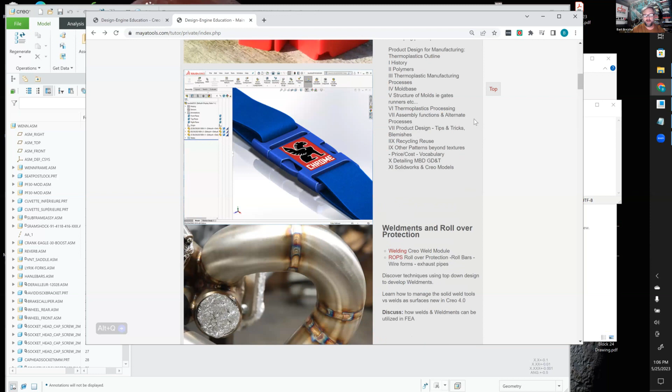So I'm going to scroll down, and I'm getting past the SolidWorks material. I find it funny that...

When I'm teaching a class to a bunch of SolidWorks people, or vice versa, SolidWorks to a bunch of Creo people, sometimes they don't know who I am. I've been using SolidWorks since 1997. I've got a lot of experience in SolidWorks. I think it's come a long way in the last 10 years, so I'm excited about it, but it's not Creo, and people just complain about stuff they don't understand. I just tell people, quit being emotional — let me just show you how this tool works.

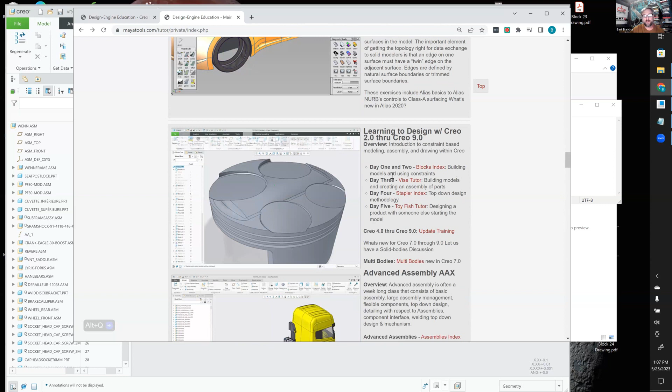So I'm scrolling down here to the Creo training. This big piston here is where Creo starts. This is our one week Learn to Design course. People with 5 years on Creo should take that course, and you definitely won't get bored.

People with a significant amount of SolidWorks or NX experience should take this course as well. I'm scrolling down through the top-down design program. I know a number of you on Zoom have had classes at Design Engine before, probably less than 10%.

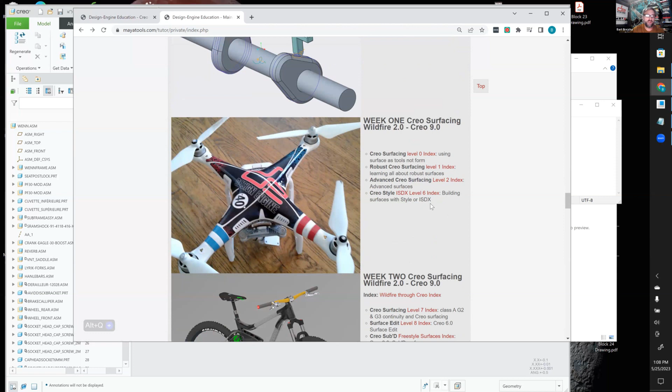Here's our surfacing week 1. Each one of these links is a 2-day class, so there's four 2-day classes crammed into a 5-day week 1. Week 2 starts with advanced surfacing. My definition of advanced surfacing is very different than what PTC might call advanced surfacing, by the way. And Class A surfacing, I'm coming down here to the REX and the import data doctor.

So this is leading me into my talk today. I put together a series of 2-day classes that make up what we call the reverse engineering week. Reverse engineering means many different things to many different people. If you're talking to a double E, they're thinking reverse engineering as in how a motherboard works, or maybe reverse engineering software.

We look at a competitor product and think about how it might work with CFD or structural integrity. So what often happens is the manager says, go out and get a scan of that thing, and as a good young engineer would, you just do exactly what they're told. What we need to learn how to do is ask narrowing questions without sounding argumentative, because it's easy to sound argumentative.

Well, why do you want the scan? Well, I don't know, just do it. What I'm trying to get at is, if we do this scan on this manifold and you want to do a CFD on it, and the manifold was designed in 1950, you want a baseline so we can change the design slightly, run a new CFD, iteratively, right? So the manager often gets frustrated when they get a scan and they can't change it at all.

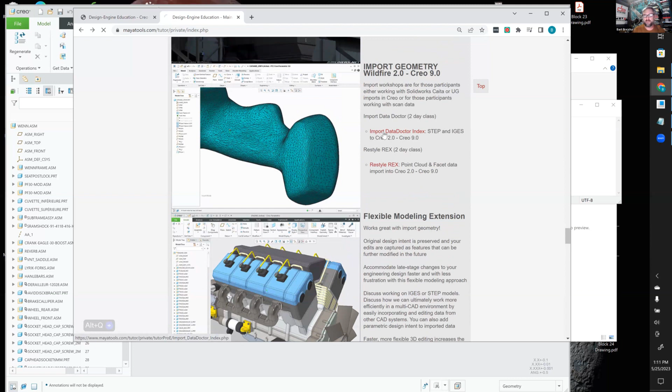All right, so I'm just going to quit rambling and jump into the data doctor exercises, and I'm just going to scroll down to show you. I've got a bunch of little exercises to do. I think it's important to start from the beginning.

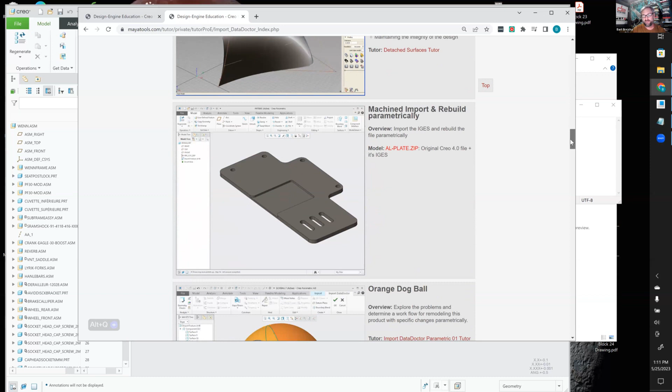If you were to give me a 2-day class, you're by far the expert at managing imports. But what we do inside that import is convert everything to be parametric. Now, I remember it was a Michigan Creo user conference that I was at...

There were two gentlemen, I overheard them talking, like, everybody knows you can't make dumb STEP data parametric. Let's go see what this idiot's got to say. And I was standing right there, you know. Well, I teach that class. I can make anything parametric. It's a workflow. Maybe that's a talk I did at the Badgerland user conference probably 15 years ago. But it's really simple, everything's a workflow, right?

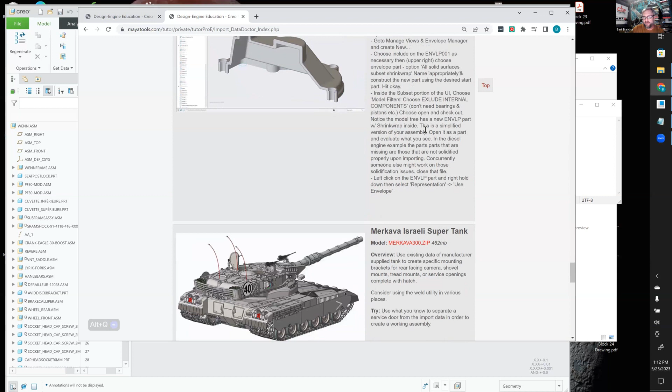So I'm just kind of scrolling through this thing. There's a bunch of assemblies to play with. Here's some imports that didn't come in, so we got to rebuild it so we can make the solidification occurrence happen, and maybe it's not shelled out. So here's a Merkava tank, pretty cool stuff. I've got a whole bunch of exercises to play with.

This is a sheet metal part, and it's very difficult for me to choose which one to do. So Deb had mentioned, hey, there's a couple people inquiring about nuts and bolts, so I was just going to kind of start with a few things and play around.

So this bicycle, we've machined it and we're racing it this year. This is a SRAM sponsored race team racing in Denver. Look, it's got a high pivot. So the design director of SRAM sent me a bunch of files that they had, and they delete stuff off the import so that we can't go and reverse engineer it.

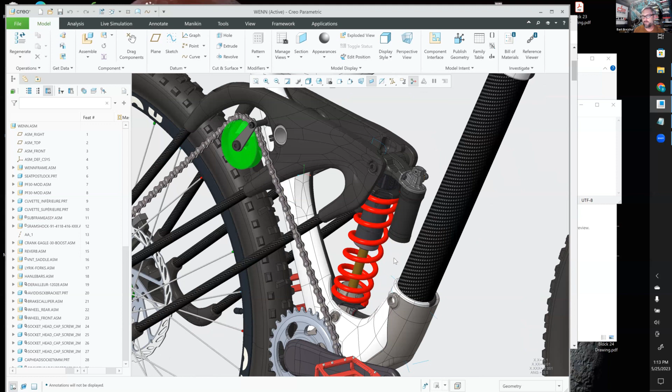So it was a couple years ago when I was designing these parts. I probably spent 20 hours just solidifying all the geometry. The front forks had holes all through it so that someone couldn't build a solid geometry and machine them. I fixed everything as an exercise. It's an extremely valuable skill set to have.

Taking something that shouldn't be 3D printed, or machined, and setting it up so you can machine it, right? You give me the model, I'll make it on my CNC machine.

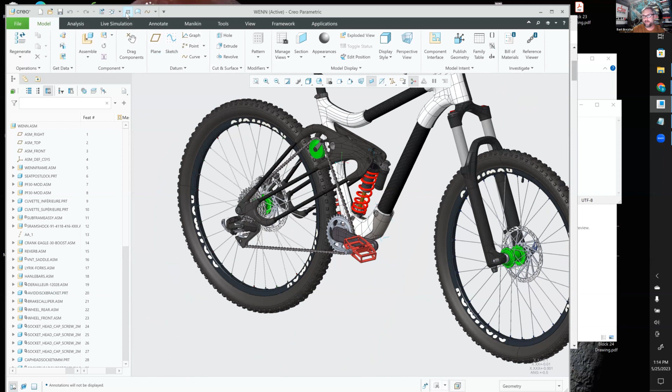So all the components that SRAM gives us, including the chain, is exported out of Creo and ultimately created as a step file.

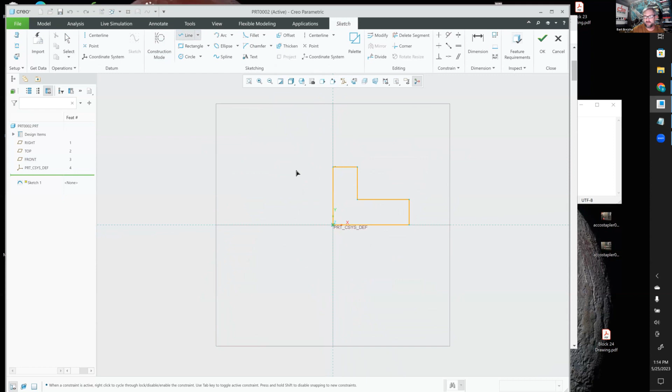So what I'm going to do is the very first exercise of our surfacing class. This is a really good introduction to what surfaces and imports are. I'm modeling just a simple little L bracket, I don't care about how it's dimensioned. I'm just going to extrude it, hit the middle button, and export this as an IGES file. IGES is just quite a bit older than a step file.

And then I'm going to bring it in incorrectly. Some of you, I recognize your names, you've had a class with me recently. And the joke is, if you wanted to complain about Bart's class, you'd say the instructor showed us how to do it wrong. Well, that's exactly why I show you how to do it wrong, so you don't do it wrong at work.

But if we try it a few times, we get pretty good at it. So I'm going to say IGES file. I'm in my Creo 9 import folder. I go file open, file open, I'm going to open the IGES file.

So this is one of the things I've been pushing PTC to do for a number of years, I'm going to say 20 years. You see this button? It says use templates. You can set this as a config setting, but nobody does, and I can tell you it wastes probably 4,500 hours a year with most organizations, including the US Army. If they just made this default, it would be so much cooler. I'm going to leave it off and do it wrong on purpose.

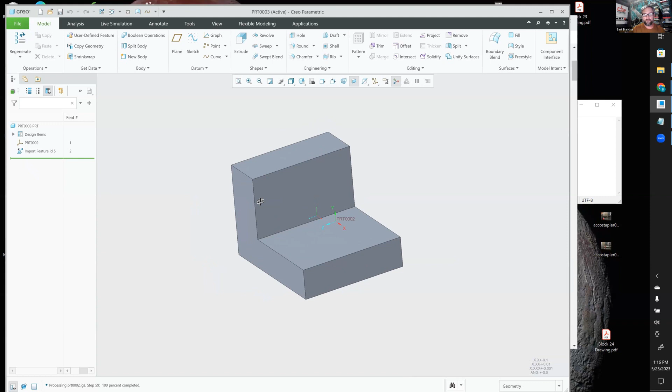Where's my datum planes in my model tree? Every single model I get from India and China comes back like this. Well, what I do is I write a script on 500 parts that I've got to make drawings out of. Our team's doing work for toy companies around the world.

Then you build the three datum planes, resume them, then you've got to rename all three. I want my script to do all that for me. It works about 80% of the time. And then you've got to add all the parameters from Windchill.

So if you're ever involved in hiring an outside company and the outside company doesn't ask you for your start part, that's a big red flag, pick a different consulting group. So that's not how I want to roll.

So I'm going to go file open, go for my import, and pick use templates. Now it's grabbing my start part. Look, datum planes, I've got all my named views. So I start out this talk on this point because it angers me how many hours we waste fixing stuff that would have been very simple if people would have just had a class.

All right, so I'm going to edit definition on this import. Hey, it came in solid. I don't need to edit definition on it, because maybe I'm Kenworth Trucks and I buy a lot of parts off of McMaster and assemble that after sourcing it on my tractor trailer.

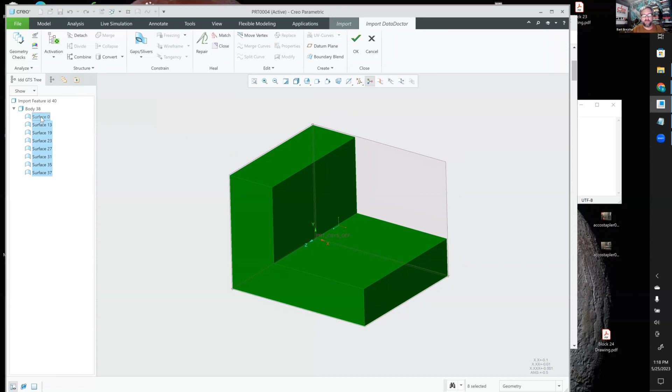I don't know, but what I've got are a bunch of surfaces that I can shift-select and delete if you wanted to. I'm going to hit Control Z because I have no intention of deleting them. So you can pick them on the face and get rid of them. Okay, I'm going to close out of here now, import data doctor, and I'm going to open up that block that I just had a moment ago.

I don't remember what I called it. And I've got a bunch of stuff in memory, so I have to remodel that square.

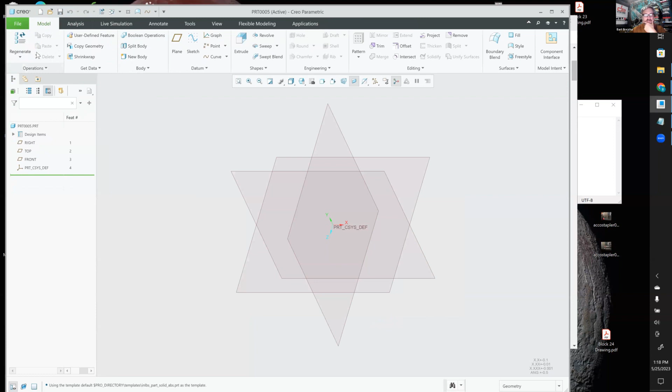I'm going to re-export it with another little setting. As we learn, surfaces are really nothing more than an interesting hammer to use for an engineer. It's a tool that can be utilized to make you more effective.

Okay, so now I'm going to file save as copy, and I'm going to save out as an IGES file again. Why? Because IGES files tend to be a little old. I'll just overwrite that one and call it 3.

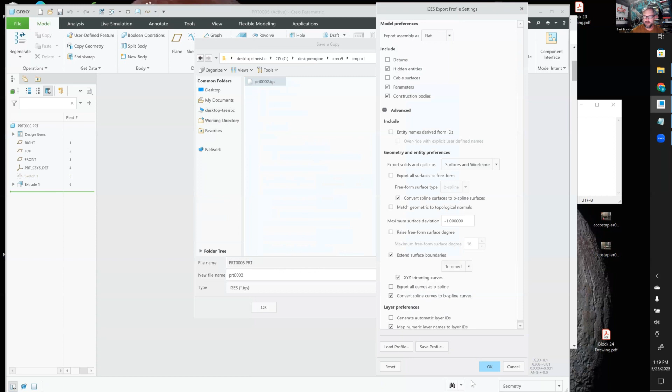This time I'm going to go into my options and change a few things. Instead of exporting it as surfaces, I'm going to take this bottom option. Oops, I meant to hit OK, but my Zoom interface is in the way. There we go. Now I'll just leave that open, and I'm going to go File, Open, and I'm going to grab that IGES file again.

Okay, this time it picks use templates. By the way, there's a config setting to set that. Now I've got my default datum planes, and look, I've got these extra curves on here. So let's go and edit definition and investigate what we get here.

I'm going to click on my import data doctor. Hey, look, in my model tree, I have a couple extra things to kind of mess around with. I'm deleting some of these surfaces here.

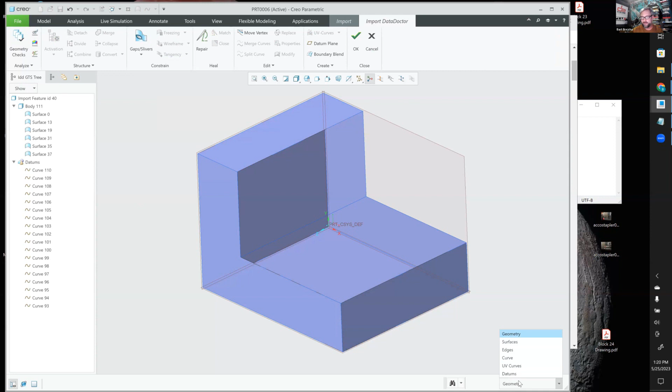You could window the surfaces too. You got to come down in here and segregate down to surfaces. If you left click here, anything you circumnavigate gets picked, top left, bottom right.

This is Microsoft industry standard for 25 years. Bottom left, top right, anything you cross gets added to the selection set. So I'm just deleting all the surfaces, and look, I'm left with the wireframe outer geometry curves.

How is this relevant? Well, if I have to go back and rebuild this stuff, I have things I can go back to rebuild with. This is kind of going down the road of how I make it parametric.

So look, now I can go in here and I'm segregated to surfaces. I'll go back to all the geometry, and I'm just going to pick all the vertical lines out here. Is anybody trying this as I go?

I saw Matt join. He used to teach this class a while back, Matt Holter. I'm just kind of removing some of the vertical geometries here.

And now this is where in the surfacing class, it can get a little bit confusing if you're not paying absolute attention. Usually in the surfacing class, this is a road less traveled, building it all inside of the Data Doctor tool. Look, I've got everything I need to rebuild this geometry.

Now it's a class. I deleted stuff. It was kind of perfect before I deleted it, but you get it.

I'm going to check out of it and get back into Creo now. I'm no longer in the Data Doctor. And I'm going to build my curve tool to reconstruct this stuff.

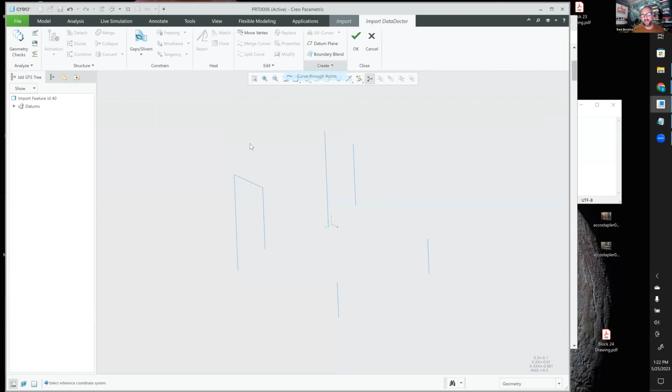I don't work at PTC, but I imagine their India partner built this tool. Who knows? But it works quite a bit like the style tool. In this case, I have to hold the control key down to pick the other side.

And how do you know? Well, if you don't hold the control key down, it becomes clear that you need to hold the control key down. So I'm using my Creo intuition, if you will.

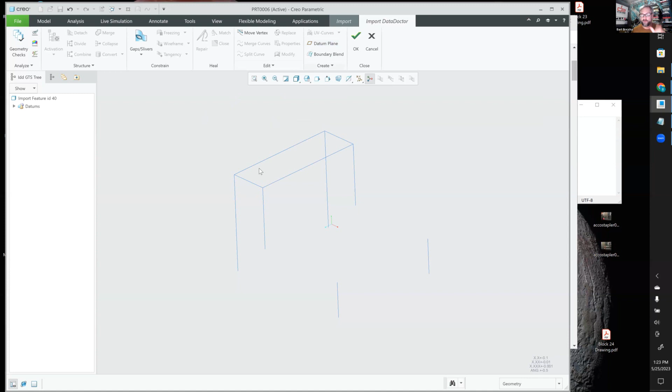So here I can go back and reconstruct this whole thing real quickly inside of the tool, and I can do it outside of the tool. Kind of whichever you care about.

Now, the typical BSME is going to think, hey, it's got to be better outside of the tool because I maintain some parametric ability. But you're tying it to something that we call dumb data. It's not modifiable, right?

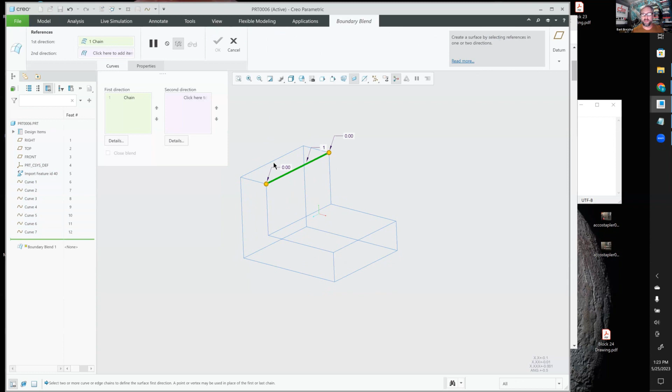I can modify it. It's quite modifiable, but most people think of it as non-modifiable data. And now I can build up surfaces outside of style, or I can build surfaces inside of import Data Doctor.

So the difference is the surfaces built up inside of Data Doctor don't maintain any parent-child constraints, much like Rhino. I don't know if anybody messes around with Rhino, kind of a toy. We teach Rhino, we're actually teaching a grasshopper class this week. I should be down there taking the class.

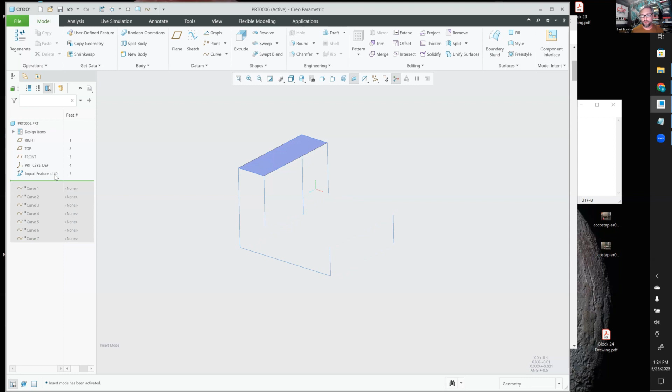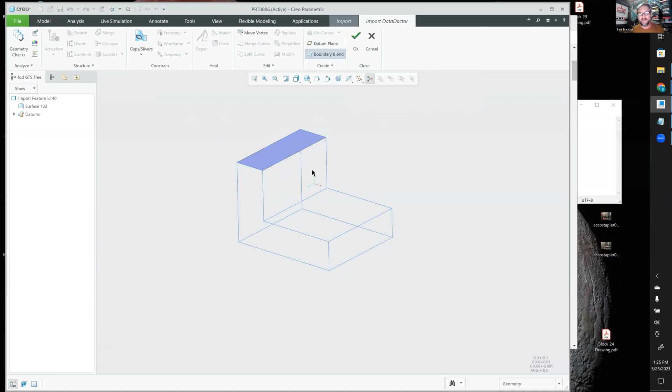Now I've kind of mixed and matched. I got a couple curves built inside of style and a couple outside of style. So I'm going to shift select the entire model tree and come over here to editing and collapse everything inside of the tool. There's some really interesting workflow ideas for managing modifications to a model, maybe I can get to that before the end. But look, I collapsed everything back in there. That seems like not a big deal, but it's pretty impressive to be able to do that, and there's a whole slew of workflow we can think about.

Now what I'm getting to here is that we can rebuild problematic geometry if necessary.

Hi Rowan, how you doing? You want to say hello to my friends? Say hello. Hello. Daddy, are we going to the pool? We're going to go to the pool later.

Yes, with class. Right, so I'm building all this stuff up inside of the Data Doctor. You know, you have a choice, I think that's pretty cool. That's the best part about being American, you got a bunch of choices, right? Now how do you merge all that together? Well, let's check out of it and see if it auto merges. Hey, it's not solidified, see?

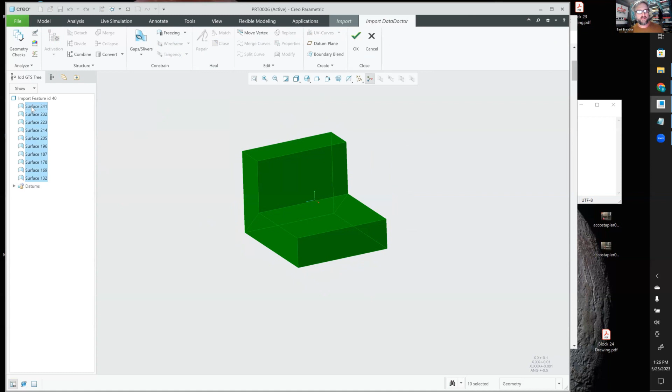So merge, if you know surfacing, is a technique that here we call combine. Okay, so now I've combined everything. Let's right click on it and see if it'll let me solidify it. Yep. Let's delete the solidify, redefine the import, and see if we can add bodies to the mix. Okay, for some reason it didn't work, but that's okay, we can just solidify the whole thing. Now I'm back to what I had originally. I can shift select both of those and collapse that, and now I'm back to what I started with.

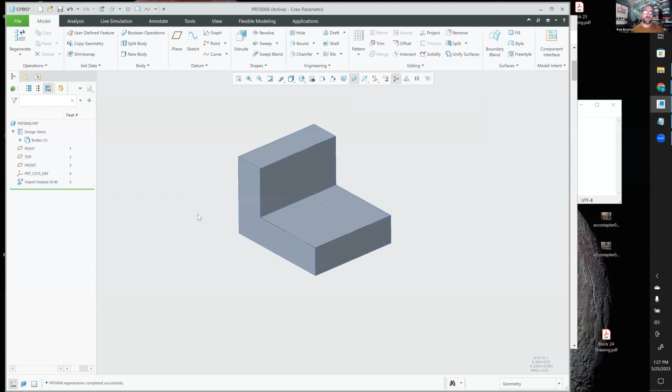So any questions? That's my first little example. I was just going to go down to the second example and play around with this pan head screw, if you guys are good with that.

All right, I've already exported this button screw, whatever we're calling it.

Okay, and I think somebody mentioned, how do I delete the threads off of something? Well, there's a bunch of ways to do it. The simple, easy way is just to create like a big old extrude. Some of our managers get kind of emotional about having too much extra geometry in the model, because it can slow down the spin and shading of the model. Look, now there's less surfaces in the model. That's the quick and dirty.

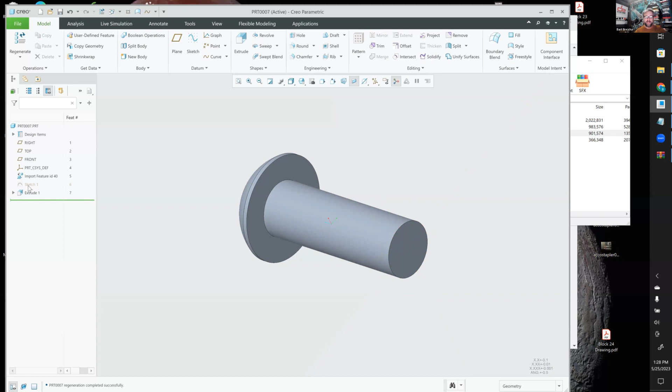The part that blows me away is what PTC has done to flexible modeling. Now I'm involved in a lot of the development of how Creo gets built and stuff. I encourage you to be on the technical committee.

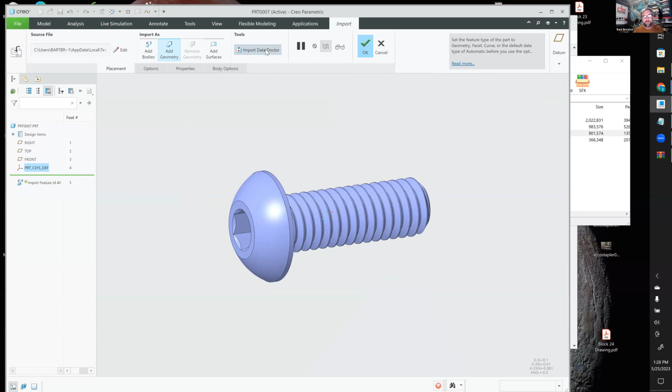I'm going to click on the import data doctor, and what I'm going to do is delete the Allen head hole here. If you're good at building selection sets, you're probably an expert at Creo. I'm just going to click on anything here and use the shift key. Look how it automatically collected all that, dude, I wish SolidWorks did stuff like that. Kills me, you got to pick every single surface. I don't know how they get away with it. It's like SolidWorks people just like clicking on things, I guess.

So let's hit close here. So what I did is I just deleted a hole. That absolutely blows my mind. I'm going to undo it and do it again.

This is how oftentimes early adopters like me will get in here and just play with every tool inside the import data doctor and learn things I didn't know you could do. This is how PTC would roll out. I don't work at PTC, so I should be careful about what I don't know, right? But this flexible modeling extension is where they exposed all those tools to let dorks like us play with it. Flexible modeling is wicked, so I'll do it again.

I'm going to click anywhere inside. I'm going to hold my shift key outside and shift select everything in between.

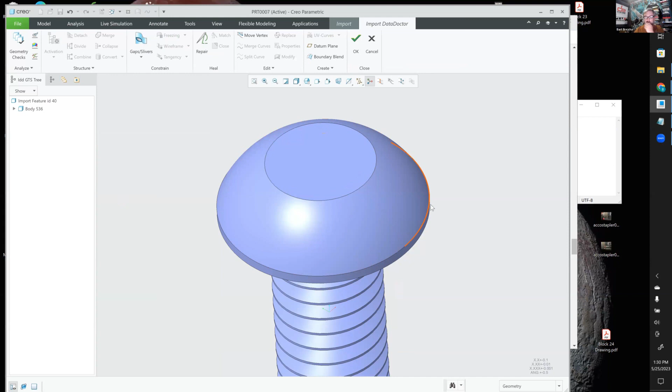Close. All right. For the flexible modeling, they use a different term, remove. Let's see if we can remove the ribs, the threads.

So here I got to hit control. I'm looking here, let's remove the chamfer as well. All right, it looks like I got the thread selected, both, I'm holding the control key now. I got the left and the right side of the thread. What do you figure is going to happen when I hit close? Look, I left something off here, right? I got everything. Let's hit close.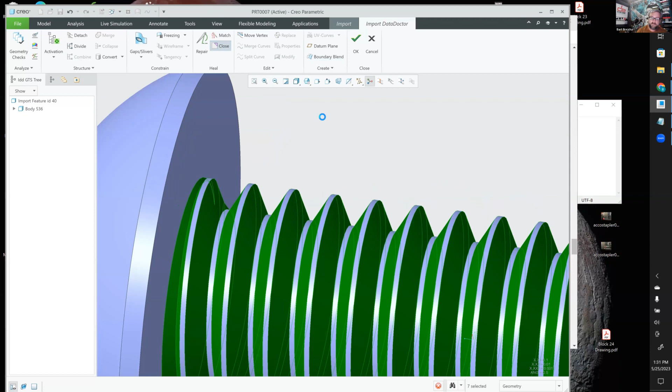Hit the middle button. The spinning ball of death for a second. I would expect it to have been done by now.

Okay, maybe I had too much selected, right? So we'll try it again. Pick the inside, pick the outside. This time, I'll just grab the chamfer as well. Hit close.

Next time I'll try and I won't grab the chamfer, or maybe I'll just grab the chamfer. While it's thinking, I'll look at the chat window. Some people making jokes on here.

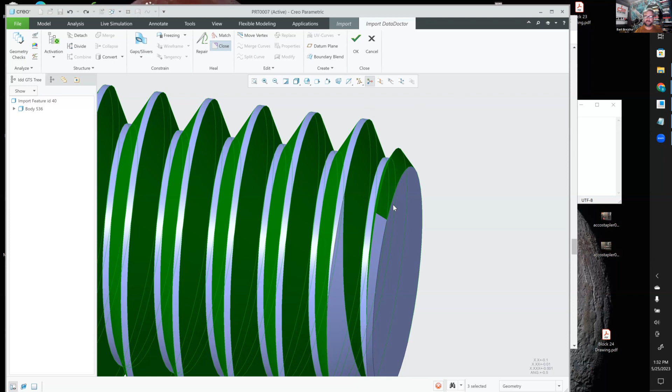Maybe I should have grabbed the inside wall as well, right? So you can hit this little stop sign down here if you want to stop it and try something new.

I noticed on a wish list, somebody said they wanted a stop sign. I was like, well, I thought they already had one.

So this time I'm going to build my selection set a little differently. This is all about how you learn, right? You got to figure out how you're going to build stuff. I still got my spinning ball of death. Okay, got back out of that. Let's try it again. This time I'm going to grab the inside wall and the ribs and the chamfer. Let's see what we get that time.

You know, and if you really want, you could just delete it or just create a solid over it like we did initially.

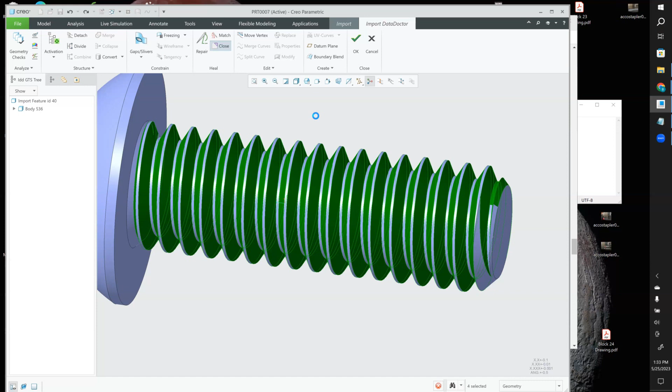Bart, this is Deb, my employer, so I don't know if you were in early, does not want these threads, and you've got a 100,000 plus component assembly. They also do not want us to just extrude over them with a surface or solid extrusion, because they said that, okay, it's still in there, maybe visually, but it's still in there, still complicates the model.

So anyways, I disagree, but there's two types. I don't mean to be argumentative, right? Because anytime you disagree, it just sounds argumentative, right?

And when you opened it, it had to regenerate the part. One was very tiny and one was very big. So we don't do that anymore. I think around version 9 they quit that, maybe version 10.

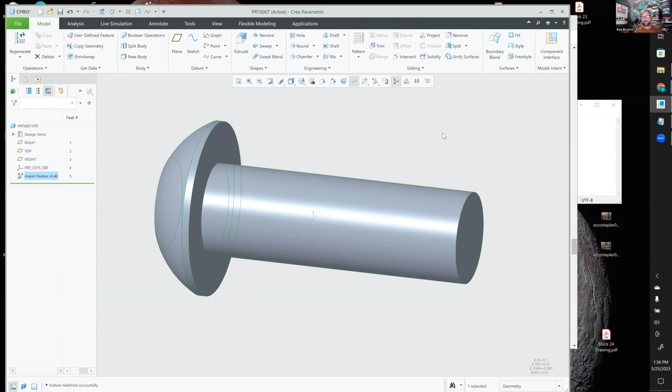Does anybody want to see that again? I can hit Control Z and get back to what I started with. I have 20 minutes left. Let's see.

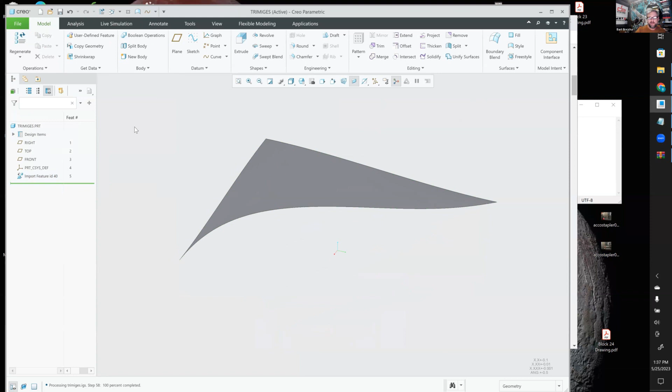Let's look at what a trim surface is. So I have quite a bit of experience using Alias software, which is what the automobile industry uses. Tesla uses Alias to make the outer geometry of the cars. I think Creo can get real close to what Alias can do, but it's really hard to beat Alias, right? So what I want to do is just show you what a trim surface is. This geometry started out as a square, right? And in Alias, I built a curve across here and projected it onto the surface and then trimmed it.

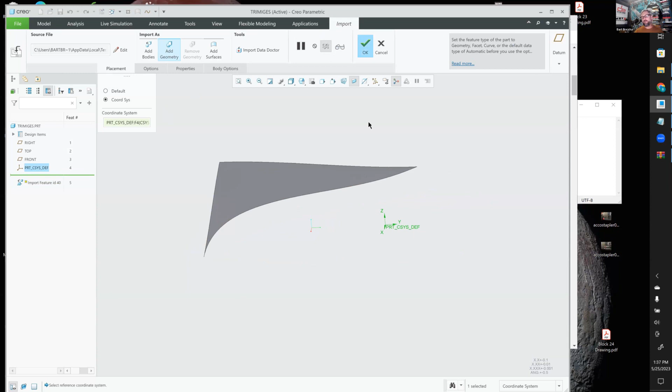So in order to be good at fixing import geometry, you need to know what a trim surface is, and Creo doesn't really have any vocabulary for that.

So what I'm going to do is click on this geometry and hit delete. It just got untrimmed. But if I need to recreate that trim, because it needs to be parametric, how do I know where it was? It's too late, I already deleted it.

So I'm going to check out of here, and build a composite curve off the top. Control C, Control V, have the curve on top. I'm going to collapse it. Remember the collapse utility right here, middle click. Now I'm going to edit definition on here.

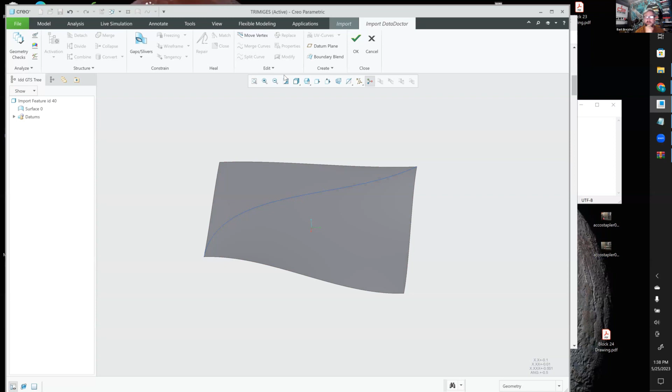Go back into my data doctor. I'm going to click on the edge of the surface and hit delete. But look, now I have a record, a fossil record if you will, of where the curve needed to be before I built the trim.

Collapse, this collapse absolutely blows my mind. I've got a whole bunch of tips and tricks to play with in that week 2 surfacing. I'd be curious to get a show of hands to see how many people have had week 1 surfacing - that really sets people up to be in a very different category. Week 2 is just expert status.

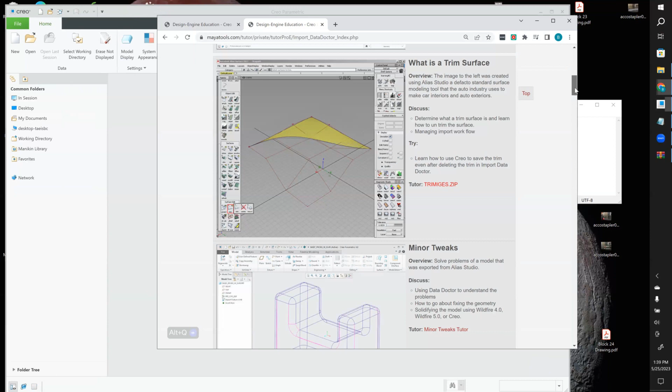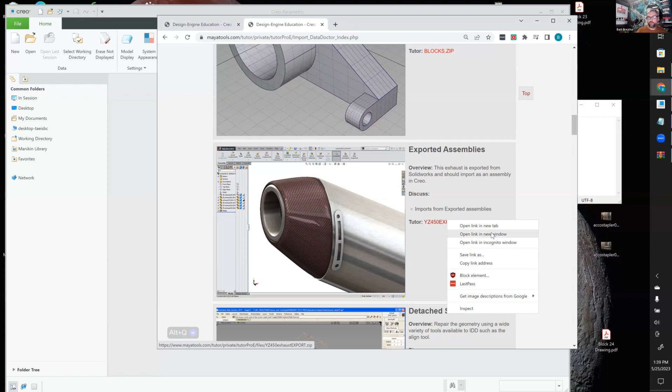Hey Mark, this is Tim Walker, long time no see. But yeah, I was thinking back to the previous example you gave, Bart - I recognize your voice - heck yeah. I think that was kind of perfect for what Deborah was asking for. She's saying the boss doesn't want to be doing extrudes over the threads or anything like that. We want to simplify this geometry, and deleting the threads with the import data doctor tool - I can't remember the name of it. Close? Was it just called close? Close and remove, yeah. The total number of faces inside that import geometry feature is reduced by it. Yeah, that was great, I've actually never even tried that close, so I'm going to do that, thanks. That was great. Yeah, I don't want to act too excited about PTC, but there's some smart dudes working there. I'm impressed.

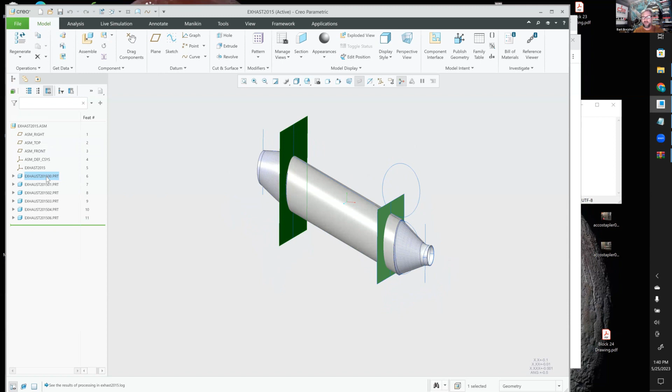So I built this in SolidWorks and exported it into Creo. I recognize what's going on with these green surfaces - we call those in our top-down design classes delineation geometries, because they delineate between all the components in the exhaust. In our naming convention, 00 is the top-down design leader for that. I'm just going to delete that. Now I've got the first through 6 components in my geometry, and so far it looks pretty good. I could probably make drawings out of all this.

Let's just grab one of the parts randomly and look at it. Hey, it's a solid, I almost don't care, right, just as long as it's solid. How do you know if it's solid? Well, in my case I exported the curves, so it could be a little trickery. I go to wireframe, and if I see any pink, then I know that's a surface that has not been merged.

So what I'm going to do is take it back to the import data doctor, and delete all the curves, or maybe you'd consider adding them to a layer. I'm just going to delete them for sake of time, and check out of it. And I think that's a solid.

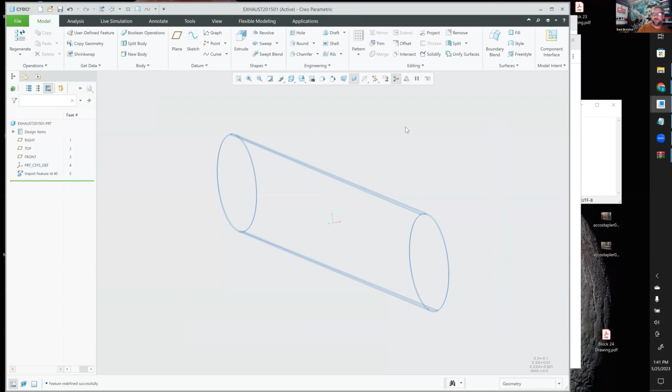A second methodology, you'd cut a cross section through it. If you can see the cross section is a solid, then it's probably a solid. And if you can create an STL file out of it, it's probably a solid. So you define solid in your own way, right? So that guy looks pretty good. Let's go look at the next one.

I don't know if there's anybody from Harley on here, but they've got to be really careful - anything that gets chrome cannot get modified. If they build it in Alias or any of their other tools outside of Creo, and I bring it into Creo and pull my import data doctor on stuff, I've got to freeze certain things because there's a tool that helped me build something. I recognize that as not part of the model.

Here, I'm going to delete all the curves just out of the model tree. Let's take the shade mode off and look at it. Hey, there's some pink stuff. That means it's not solid, right?

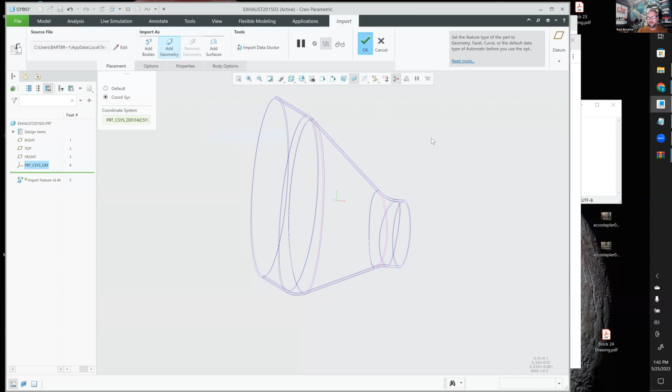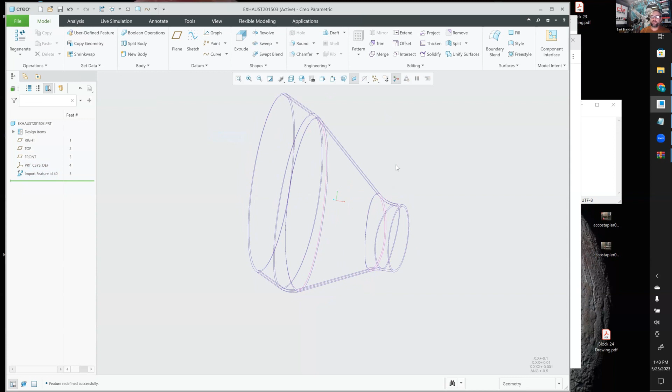So I got to check out of here and guarantee, hey, is it truly not solid? And like everything in Creo, there's no right and wrong way. I like to say the wrong way to do something is you discover through trial and error that that's not the right way to do it. You really have to push yourself and play with these things.

So what I'm going to do is just look to see what didn't get stitched and think about it. Well, what you could do is you could actually delete the surface, re-import it with another one, and see if it merges. What would that tell you? That maybe there's a little tolerance issue, maybe.

This button here is reminiscent of pre-Wildfire 4. People often complain, why do they make it so complicated? Well, I don't think of it as more complicated. This is zip gaps, you just repair it and you don't care, right? But when you look in here, the surfaces got convoluted and it didn't quite repair right.

So I'm going to hit Control Z. I like problems to chew on, right? So Howdy, Bart, go ahead.

Whose voice is that? Hey, it's Matt Holter, California. How you doing, Matt? Good to see you.

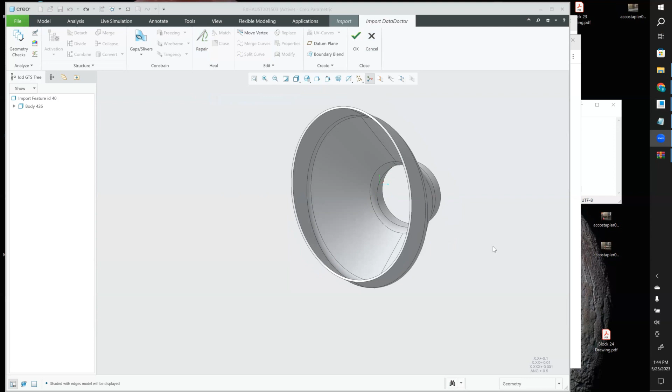Are you hip to the activate portion of the import data doctor? Well, that's what I was getting ready to show. Oh, you're getting to it? Perfect. Yeah, I was going to activate these geometries. Go ahead, what were you going to say? Oh, that's all I wanted to share with the class here. So activate, and now when I hit repair, it just works on just those surfaces.

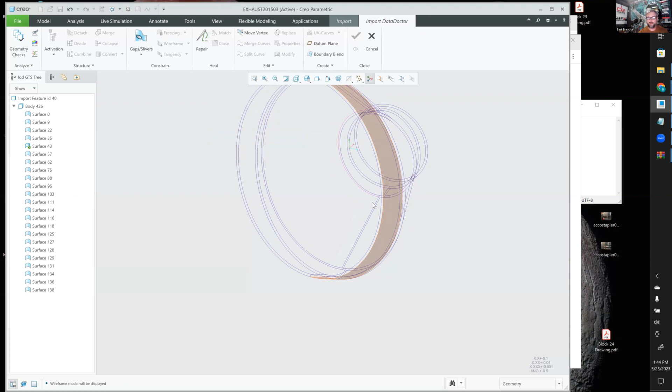Yep, thank you, Matt. Now I'm going to try to hit repair. Right, let's take the shade mode off and see what we get now. There's still some problems. This one, this one, this one, and this one.

I think I remember hearing somebody say there's not a lot of documentation for this stuff. It looks like now I've got a problem on the outside.

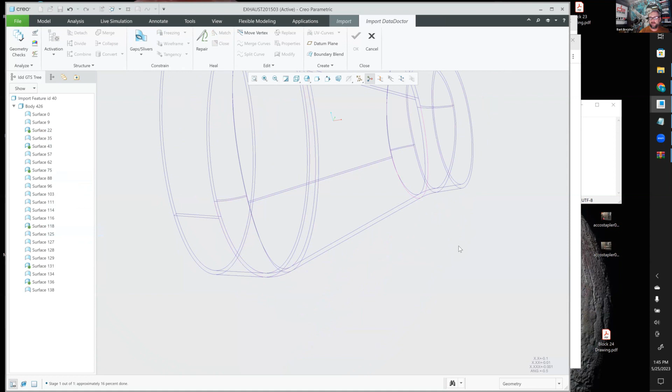So what activate does is it kind of works like how we did it old school. I would bring in these geometries as separate geometries and merge them. There's two types of merges: a join merge and an intersect merge. Can anybody articulate the difference between those?

I think of it as join is when the two surfaces butt up perfectly together, they're kissing. Intersect is when they're not. Intersect happens to be more accurate. Join tends to be a little less accurate. I don't work at PTC, but that's my backstory.

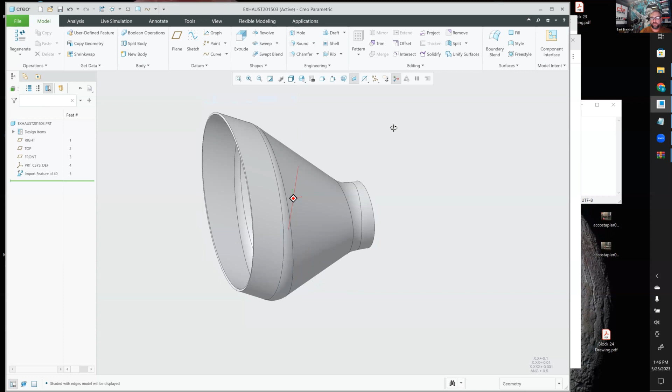All right, I'm gonna activate everything and then check out of it. And hey, it's solid. That's working some real magic there, getting that thing to resolve. Now I can just make a drawing of it, send it to the printer, whatever you're gonna do.

Hey, Bart. Yes, sir. Hey, this is Joseph Wig. I threw this in the chat, I'm not sure if you were going to talk about it. A lot of times what we do here is we use the search tool on the bottom to search for single-sided edges. I haven't gotten to that part yet. Okay. And then the other thing that I wanted to say was, were you planning on talking about the geometry checks and the import data doctor as well to help?

Probably not. Okay, so what, Joseph, you said your name? Joe, what he's talking about is you can search for gaps. I find Control F to be really funny when I'm teaching a class. I got to like Control C, Control V, Control H, Control Y, Control F.

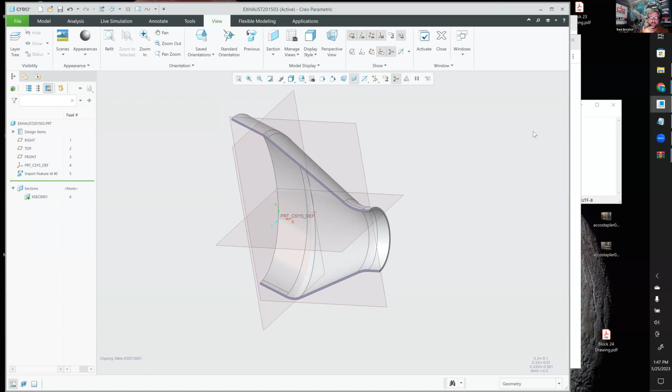Most of us, the programmers that work at Design Engine, have referred to F and H as search and destroy, because usually you're doing it on a big database and you can change things in the database. Control F will search for gaps and let you... here, this one, I'll delete the curves out of here just to show Control F in action. Just delete the curves that way.

So taking it off onto wireframe, you're hyper focused on the pink. A lot of people that take training are running with 25-year-old colors, and well, Bart, I can't see. What happens is their system administrator was an expert 20 years ago, and they like the old colors and they push those out. I think that's a mistake.

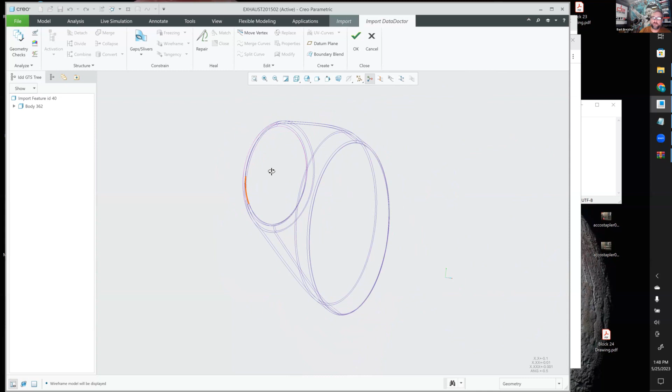PTC does a lot of usability studies, and they found an optimum color, right? But we tend to get used to the old colors, and that's not cool.

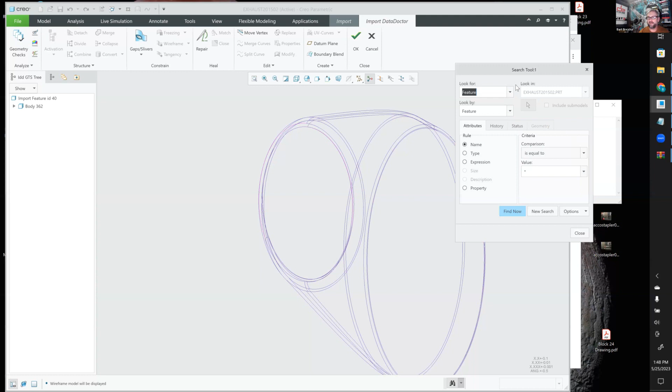So what I'm going to do is I'm going to hit Control F here and try to find any of the gaps. I did a Control F, but I didn't narrow my search. So I'm going to hit Control F, and I'm going to bring this over. I'm just going to type in G for gaps and do find now.

Maybe this isn't the best example to find the gaps, but you can make it bigger or smaller and narrow down your search. So what we do is search for edges, there's an option to search for single-sided edges, and that's how we find which edges have issues.

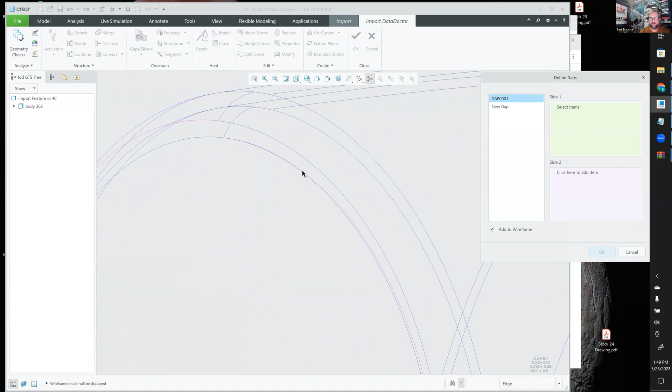If you found the edge, you can just pick it. You pick one side of one edge, one side of the other edge, and this just isn't that example, forgive me. I thought maybe it would fetch that. These edges happen to be right on the money, and it's the same problem as the other example. It's going to convolute the surface.

So in this case, we would use the activate to allow just those to be repaired, and you kind of work your puzzle like that. Let me see if I can find another example.

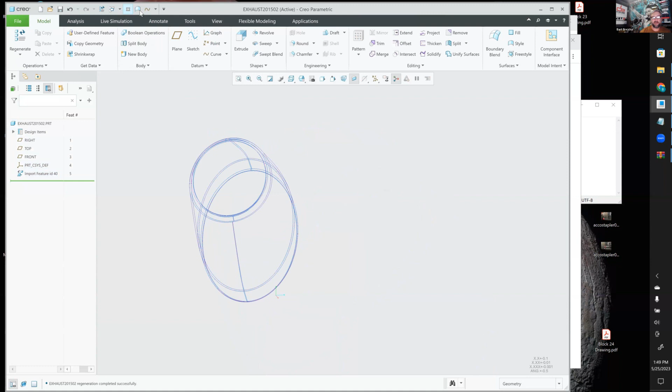By the way, this import came in as an assembly. I meant to discuss that. If you're switching from SolidWorks to Creo or Creo to SolidWorks, you've got a whole bunch of legacy data that you need to be able to work with. You can migrate that data by building the assembly just like it was exported from SolidWorks.

Let's see if I can find another example to play with the search stuff.

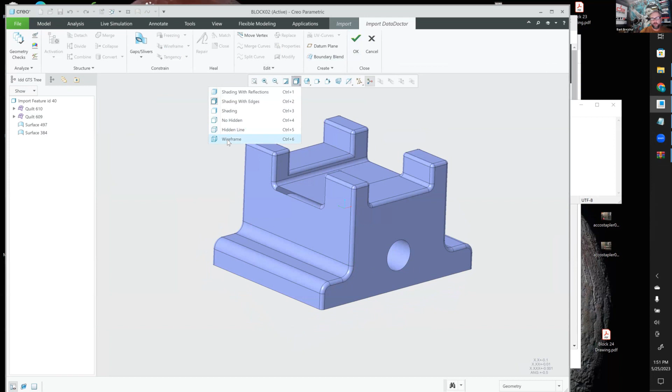Okay, so I built this in Creo, brought it into Alias and tweaked on some stuff to make it kind of ugly. Something to chew on in class. I'll go to import data doctor, turn off my shade mode to get my head wrapped around what might be part of the problem, and I have this surface here.

If you'll let me burn through my 10 minutes here, I'm just going to delete the surface completely and reconstruct it in a very different kind of way.

This is a 1-hour crash course, but in the 2-day version of this class, we go through and build all these things several different ways. So what I did is I just built a surface out of the whole thing using the fact that this and this was flat. And now I'm going to trim inside of the geometry.

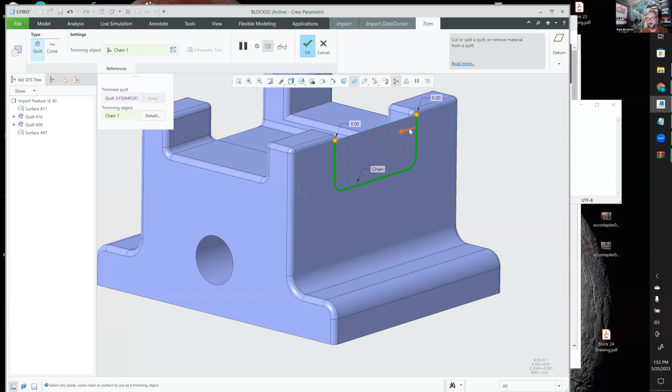I'll pick the surface and hit trim, and I'll organize my trim selection set using my shift key across here. Now I got to merge that whole thing back in. How you merge inside of Data Doctor is you just drag it inside of the body. That merged it.

Kind of a trip, huh? When you turn the shade mode off, you can see there's no purple around that edge. There's all kinds of ways to work this sort of magic.

Let's do a Control F here and search for gaps and see what we get. This one doesn't have any gaps in it.

Maybe PTC has one that's kind of gapped perfectly. I'll drag that one in there.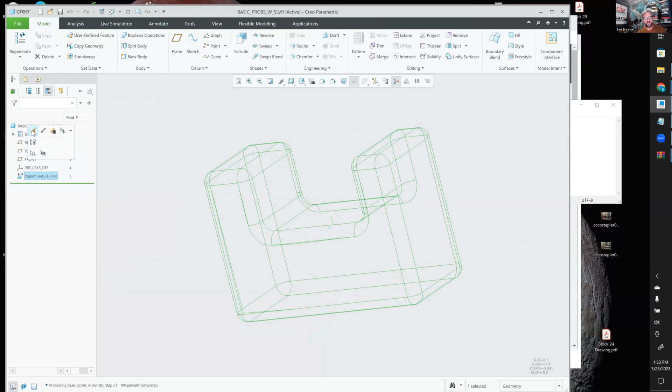This is a PTC example from a PDF that was from some years back. Let's get in there and go Control F here. Find Now. Oh, I have to activate the whole thing probably.

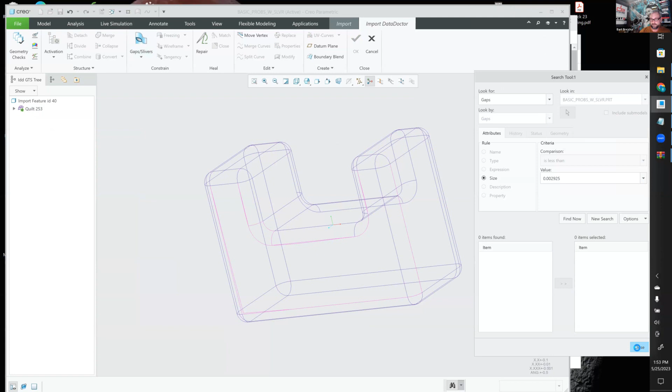All right, let's fix it first. So I can take that surface. There's a bunch of different ways to mitigate this as an issue. Move vertex.

I kind of feel like I'd like to have an O snap. If you know AutoCAD, O snap would let me kind of pop it right on the money. I'd like a setting for O snap here. This model is a little too awkward in how perfect they made it, perfectly messed up so that we could have something to play with.

I'll unactivate it. Let's see what I can do with my Control F. I'm not sure why I'm not getting any gaps here.

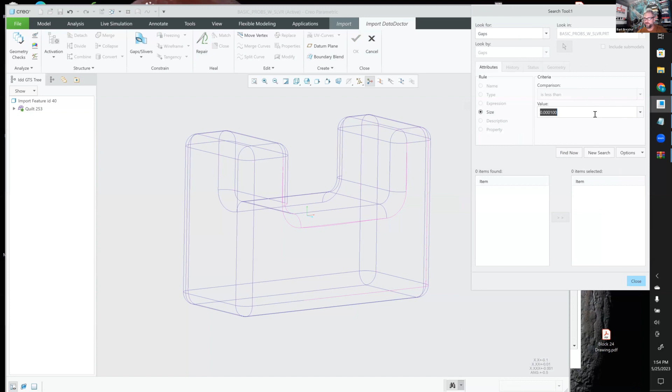Usually this would show up as I'm going bigger or smaller just to see what my problem is here. If for some reason it's not giving me a gap, but I know that there's a gap here.

So I was going to try to pick one side, then the other side, hit the middle button. Then I can hit repair, and that would collapse that gap.

That's the zip gaps that one might remember from Creo, Wildfire 3.

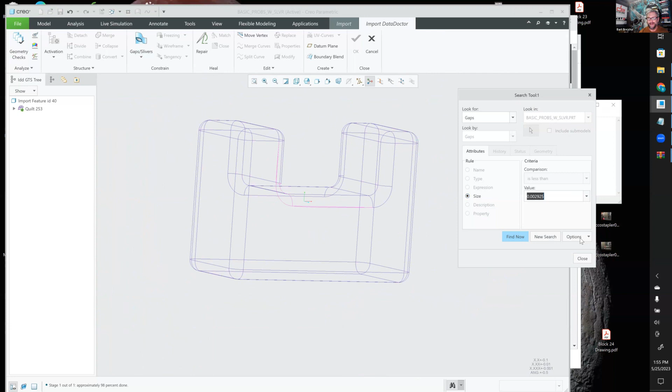I'm not sure why I wasn't able to use Control F to do that, but that's usually how what I do is I'll search for gaps using Control F. I've never really used what I'm getting ready to do here.

In a production model, this is kind of a replace. Let's try that again.

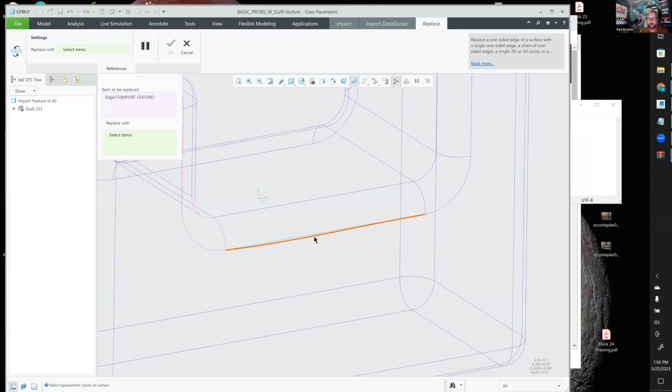Probably because I've already made some changes to the model, it's not going to let me do it. So I'm going to do that one first now. Pick this edge and hit replace with that geometry, middle click.

That's Creo 9, it doesn't let you do that one. That one's kind of finicky, I've never really had too much luck with replacing on a production model. I've had to make models for the FEA guys that are all sealed up and don't have any gaps. I use that one outside of the data doctor, that offset replace command.

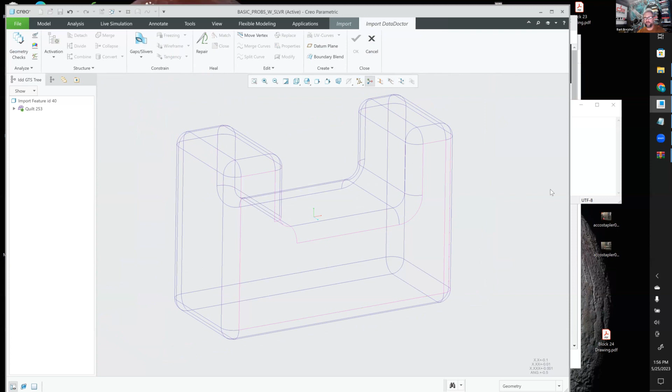Since this is supposed to be flat, I'll just reconstruct this one like this. And since this is now flat, you can actually sketch upon it. That'll blow some people away.

I'm inside data doctor playing in sketcher mode. Hey, you know what, it's not tangent at the bottom. You could probably get it to go tangent, it's a little struggle bus, but for some reason it doesn't let you do both. We'll just leave it at that.

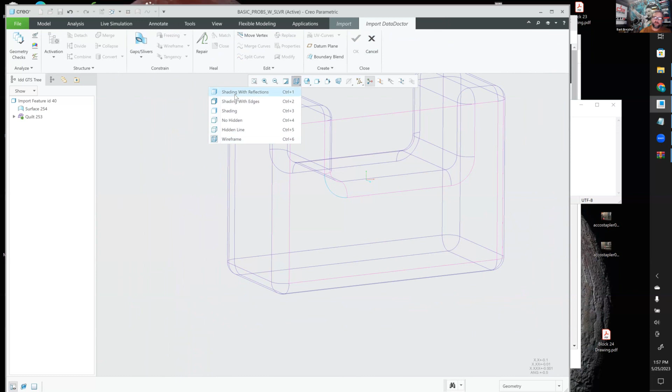There's a hundred different ways to skin these. Usually people don't care, they just want it skinned. But the Harley guys, they're bringing in an import and they don't want anything to change that's chromed, so we freeze those. I didn't demo that.

Okay, now I'm going to trim. Here, now I've got to use my shift key to add to the selection set across there. I'm fetching the geometry that's underneath there, and if I want to drag that into this mix, it's now merged. That's kind of the trick.

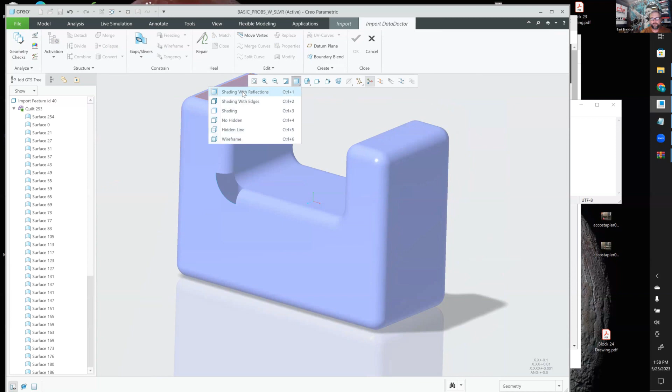Consider turning your shade mode off to see what you get. And there's no parent-child constraints, so you can actually just delete any curves you built. It doesn't delete the surface that the curve built. This boundary blend, you can build just like you do any other boundary blend.

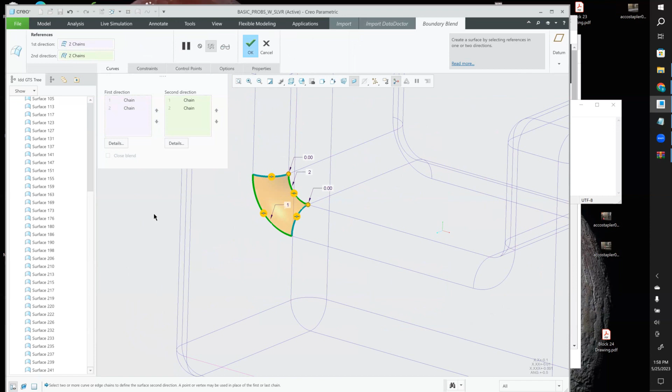We probably should wrap it up. Does anybody have a quick question, or do you want just another minute or two? I hope you were able to learn something. Art, can you hear me? I can, Jeff Ingham. Yeah, how's it going?

So that PTC model there is way too simple. I just pulled up a model I've got here that's an import. I've been asking people to send me models for two weeks, I can send you tons of them. This particular one, if I do a quick geometry check in Import DataDoctor, it pulls up 9 bad surfaces, 26 bad two-sided edges, 147 bad vertices, 15 unsatisfied wireframes.

You know what's funny, Jeff? Not added to wireframe - what's funny is I was at a major manufacturer, not Polaris, and an engineer was complaining exactly like you are. I sat at their computer, they took a phone call, and while they were on the phone I fixed it, solidified it, and they said, 'What did you do?' I said, 'Nope, got to take the class.'

Send me your model, Jeff, I'll fix it. Sure, we can talk offline.

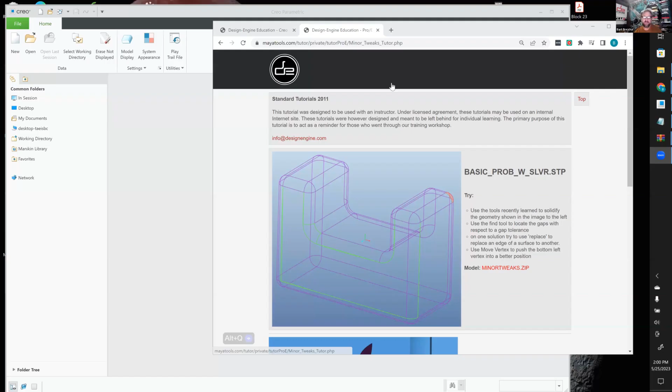Originally I was going to do the Restyle software, take some STL files and play with that stuff. I could take a scan of an inner ear and create that into a cavity where you could pour wax and have the perfect ear canal. I'm teaching that Restyle software class in July, the reverse engineering week. I won't mention the company name, but lots of good stuff.

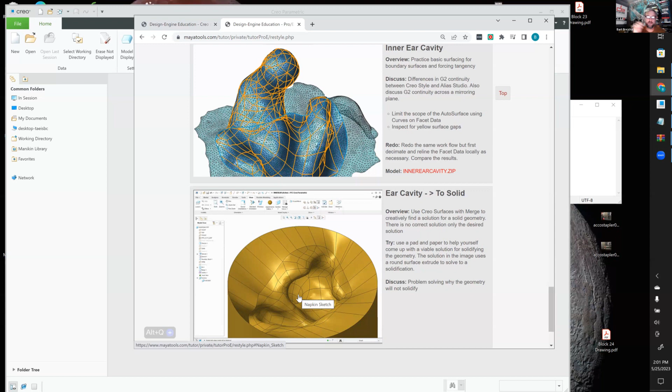So this is the scan of an inner ear with an infrared scan, I think maybe not infrared, but then here I built a perfect stitched model and reversed the merges to make a wax cavity to pour the silicone into. That's a 2-day class that we do. Usually people have something very specific that they want to do.